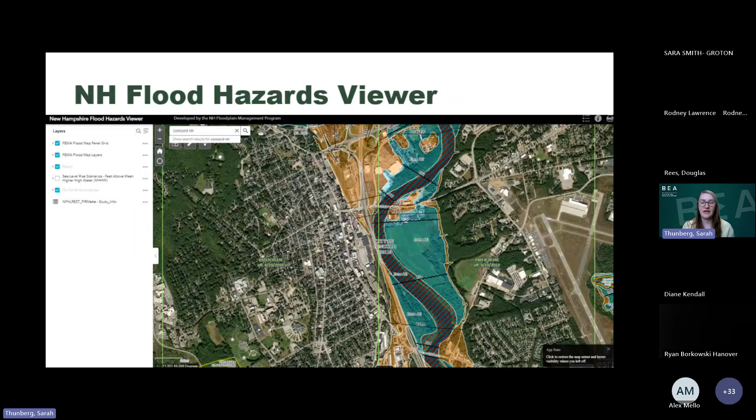So the New Hampshire Flood Hazards Viewer looks almost identical to the FEMA Flood Hazards Viewer. Right here I have a screenshot of the City of Concord's floodplain maps. We'll go over what all of these different zones mean later, but as you can see, it's very detailed - there are specific areas within the floodplain that have different risks associated with them.

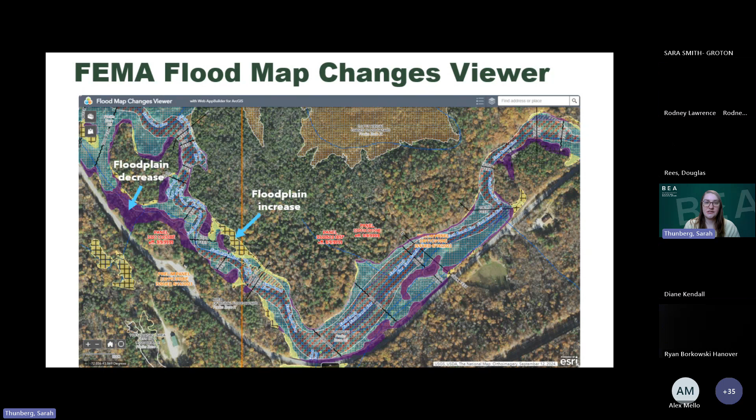Another thing you can see on the Flood Map Changes Viewer is areas that have been removed from the floodplain - all of this purple area is actually getting removed. So anyone that had a flood insurance policy in that area will have the opportunity to not pay for that policy anymore if they choose, or they can also keep the policy if they want. It also shows areas where the floodplain has increased or just shifted, shown in the hatched yellow here.

So what are the flood insurance rate maps and FIS reports used for? They are primarily produced by FEMA and then used by municipal officials to determine which areas of their community are subject to floodplain development regulations and the building requirements that apply for development in different areas within the floodplain. Mortgage lenders also use these floodplain maps to determine which properties require flood insurance as a condition of their mortgage or loan. They're also used by the general public to understand the flood risk in their area.

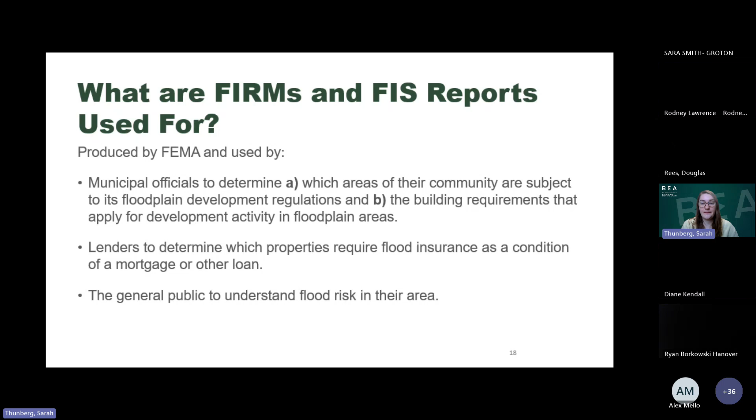So what is actually shown on these maps? What we commonly call the floodplain is technically called the 1% annual chance flood—the area that would be covered by water during a 100-year flooding event. It's sometimes called the base flood or the 100-year flood because statistically you would see a flood like this once every 100 years. Now that does not mean that once every 100 years there will be one of these floods, or that every 100 years there will only be one. You can have 100-year floods in back-to-back years or within the same year, depending on how the weather patterns happen. This is just a statistical number.

So the 1% annual chance flood area shown on the firm is also called the special flood hazard area. In your zoning ordinance, you're typically going to see this referred to as the special flood hazard area, or SFHA.

Let's actually look at some maps right now. There's many different zones within the floodplain, and generally they're going to start with either the letter A or V. A is inland and V is coastal. Areas outside the special flood hazard area are designated as Zone X.

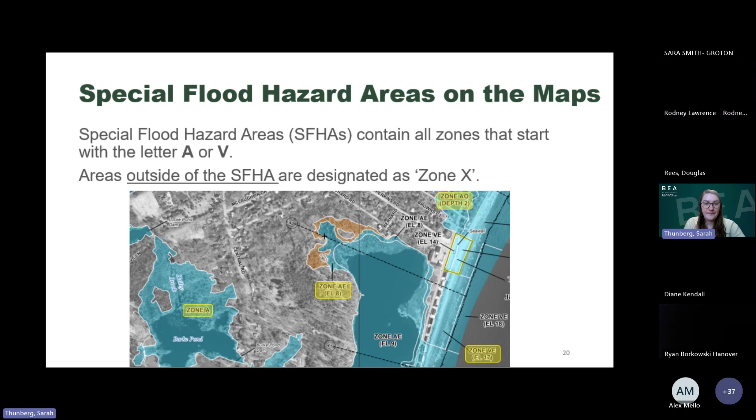Zone AE is the most common floodplain designation in New Hampshire. It is an inland floodplain which includes a base flood elevation, and it also may include a floodway along rivers and streams. The base flood elevation is essentially just elevation data showing how high geographically that water will be at the 100-year flood. Not every floodplain has been mapped to that amount of detail, so there are many Zone A's in New Hampshire, which are kind of just an approximation of the floodplain, but do not have any elevation data to show how high that water would actually be.

Then there are some areas called Zone AO, typically found like behind a sand dune on a beach, where during the 100-year flooding event that area will have what's referred to as shallow flooding, and the floodwaters will overtop some sand dunes or a levee or whatever kind of barrier berm is in the area, and then pool to a depth between 1 to 3 feet. On your Zone AOs, it typically does indicate exactly whether it's 1, 2, or 3 feet.

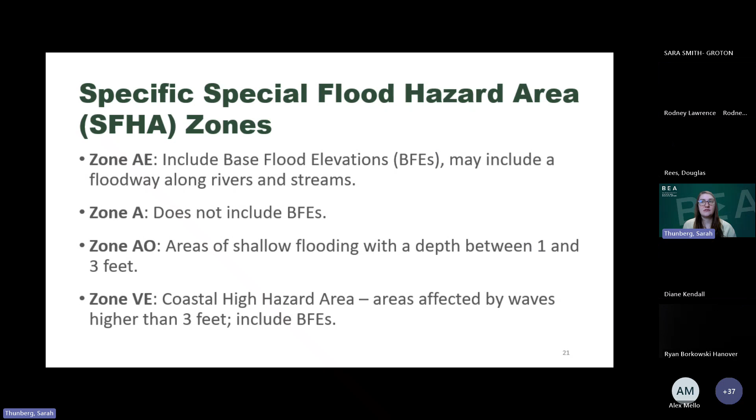Then there's also the coastal high hazard area that's called Zone VE. This is affected by waves higher than 3 feet, and those zones do include base flood elevations.

The base flood elevations shown on the maps are always rounded to the nearest whole foot. There is more detailed data in the flood insurance study that goes to the nearest tenth of a foot. That should be used for any elevation certificates, but for just general approximation, the whole foot is reasonable enough.

So the base flood elevation shows the height to which floodwater would be expected to rise in the 1% annual chance flood event. This is not a flood depth, because that is only during the 1% annual chance flood event. So if you have something that would be more considered a 50-year flood, the base flood elevation would not be indicating the depth of that water.

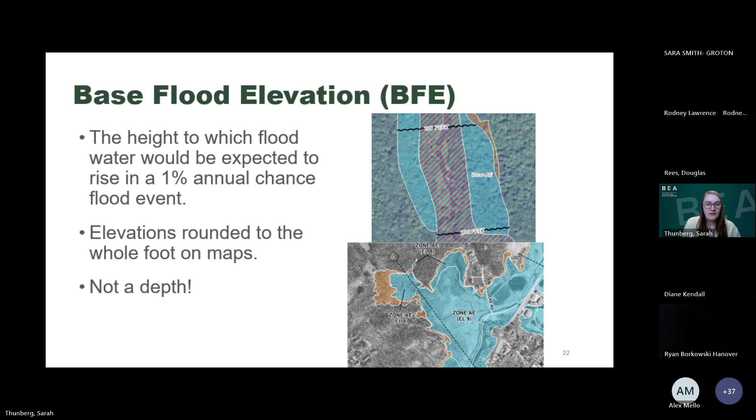Another portion of the floodplain you will commonly see along rivers is called the regulatory floodway. This is the area that will experience the highest amount and fastest flowing water during the 100-year flood event. The main hazard is the velocity of the water, flowing very fast, and the floodway is typically reserved for it. Most communities do not allow any development at all within the floodway, because that area needs to be reserved to make sure that if that 100-year flood does come, there is no obstruction to clear that floodwater away.

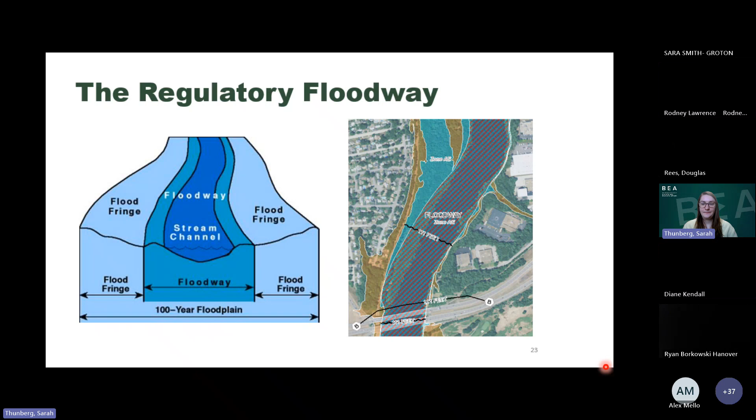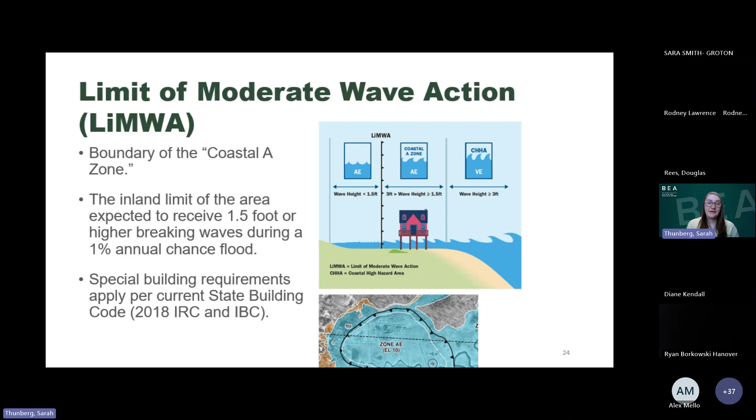In our coastal areas, there is a distinction between coastal and inland areas, and that is what we call the limit of moderate wave action, or LIMWA. It is the boundary of what we call the coastal A zone, the inland limit of the area expected to receive 1.5 feet or higher of breaking waves during the 1% annual chance flood. This area from the limit of moderate wave action seaward does have special building requirements that apply per the state building code.

Along with the flood insurance rate maps, there is something called the flood insurance study. This is a very detailed report about the flood analysis used to prepare the maps. It also includes important tables and charts with base flood elevation information.

So what do community officials need to know to use these flood maps, or why do they need to know how to use them? Your community floodplain regulations apply to all lands designated as special flood hazard areas on these maps. That is part of the agreement to participate. Communities agree that these flood insurance rate maps are the legal maps they will use to determine if properties are in the floodplain and to determine which floodplain development regulations apply.

These floodplain maps have different zones with different building requirements, such as the floodway, which typically allows no development. Depending on the community, some allow some development within the floodplain but not within the floodway. Some communities prohibit development in all of the floodplain. Those regulations are really determined at the community level, and they're different from community to community.

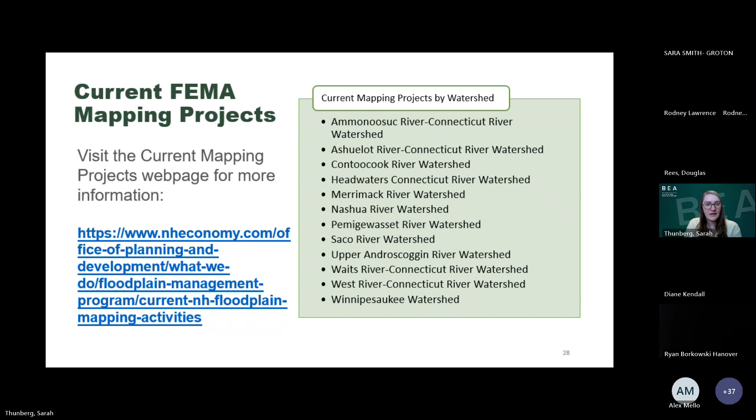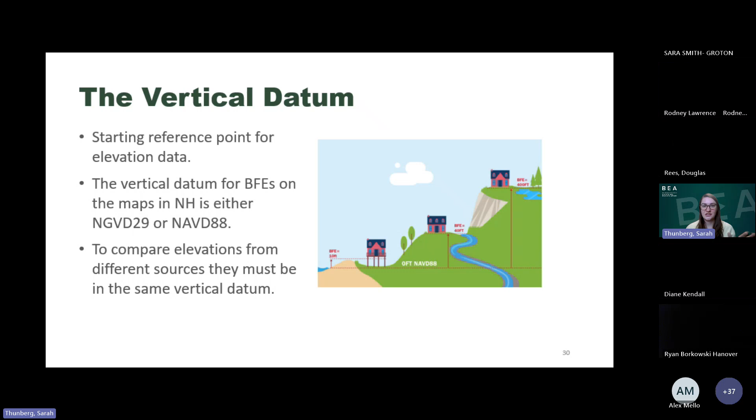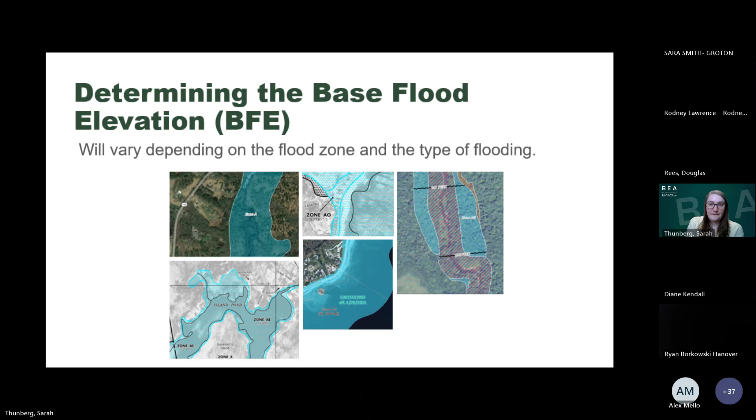How you determine the base flood elevation varies depending on which flood zone the property is located in. For most AE zones, the flood insurance study report includes more precise base flood elevation data than what's on the map, because the map only shows the base flood to the nearest whole foot, whereas the flood insurance study goes to the nearest tenth of a foot. If you're issuing an elevation certificate or a certificate of occupancy, you want to make sure you're comparing it to the most accurate data you have.

The flood insurance study also has a couple other data tables to get more precise base flood elevation data. If there's a still water body, like lakes, ponds, or some coastal areas, there's what's called a still water elevation table in the flood insurance study. It also has flood profiles, which show the height of the base flood elevation along the distance of a river. There's also the floodway data table, which has cross sections across the river with corresponding heights for that base flood elevation.

We're going to start with the easiest and work our way up to the hardest. Starting with zone A, as I said earlier, there is no base flood elevation for these zones, so that can create a bit of a complicated situation. Depending on your community regulations, that's really going to determine how you move forward to determine the base flood elevation for these areas.

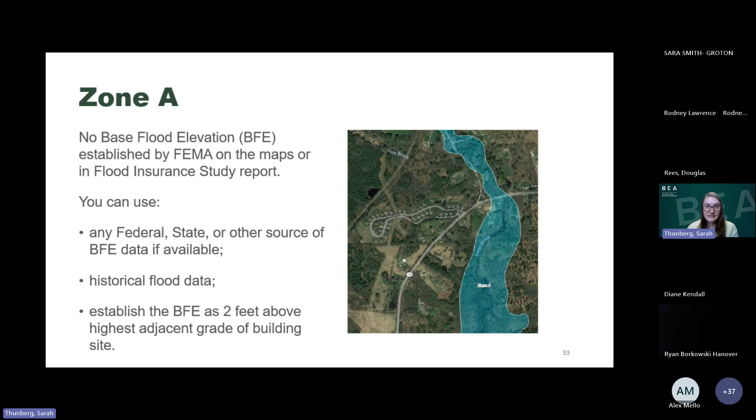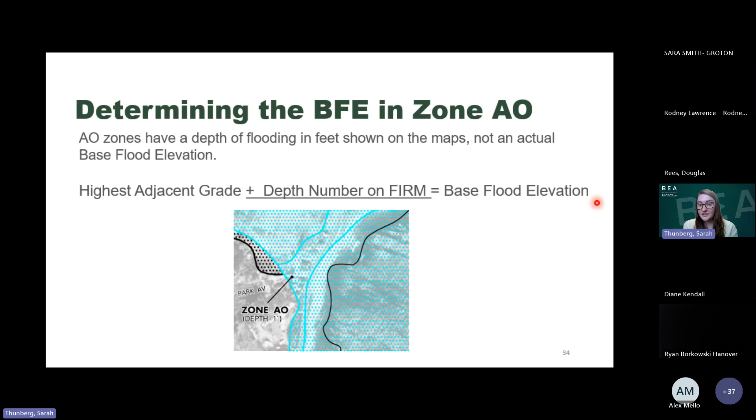All right, so AO zones are also pretty easy to figure out the base flood elevation. Your AO zone is going to specify the depth of that floodwater. To determine your base flood elevation, all you want to do is take the highest adjacent grade of the building, add the depth shown on the AO depth, and add those together—that's going to be your base flood elevation. Simple as that for AO zones.

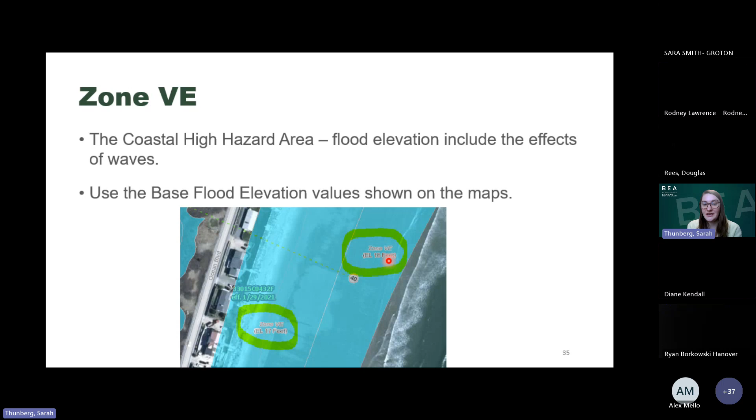VE zones are pretty easy as well. The coastal high hazard area just has the elevation right there, so you're just going to read off the map for what your base flood elevation is for these VE zones.

Now in that area along the coast that transitions over to AE zones, you want to check between the map and the flood insurance study, because sometimes for those coastal AE zones, depending on the high water, it might be different. So look up the BFE on the map and also use the flood insurance study report, and whichever of those two is higher, you want to use that. FEMA has a nice little introduction to coastal flood mapping that can be helpful if you're in a community that has these areas.

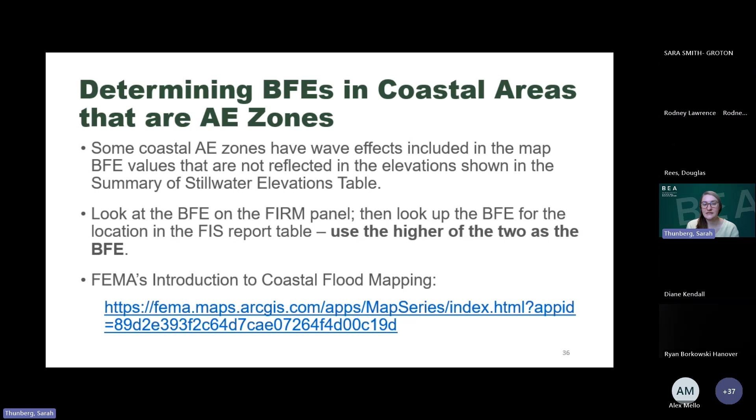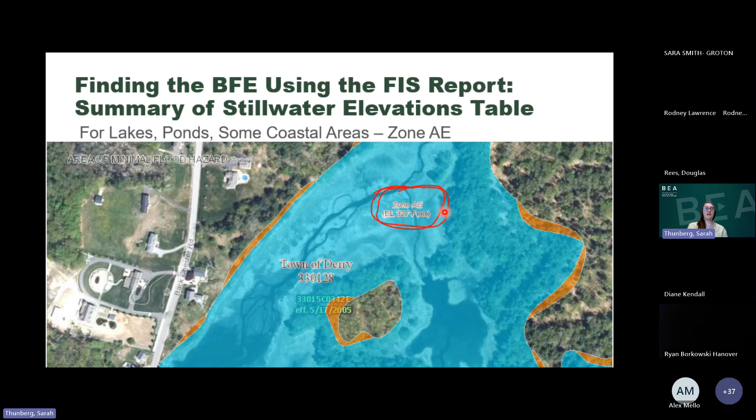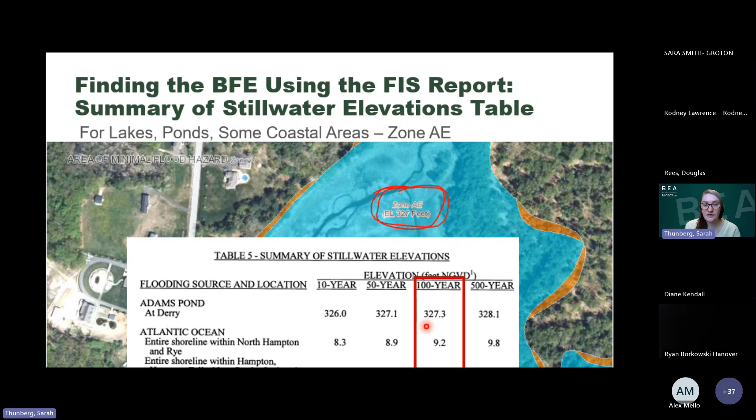For ponds, lakes, or anything with a still water elevation, you'll want to look at the flood insurance study, because it has a table summary of still water elevations. On the map, the elevation is rounded to the nearest whole foot, but the still water elevation table goes down to the nearest tenth of a foot. You always want to use the most accurate data available.

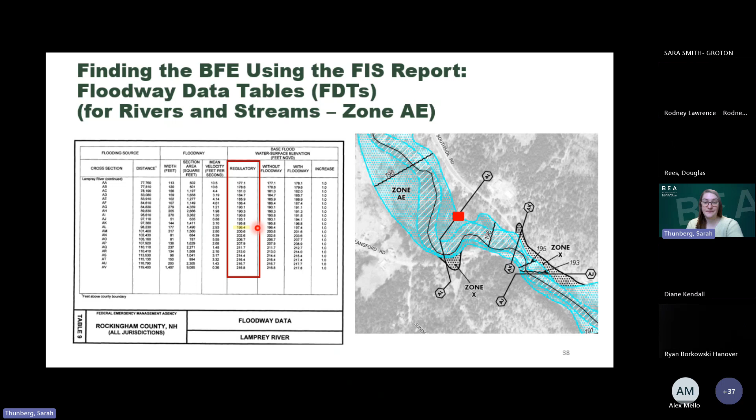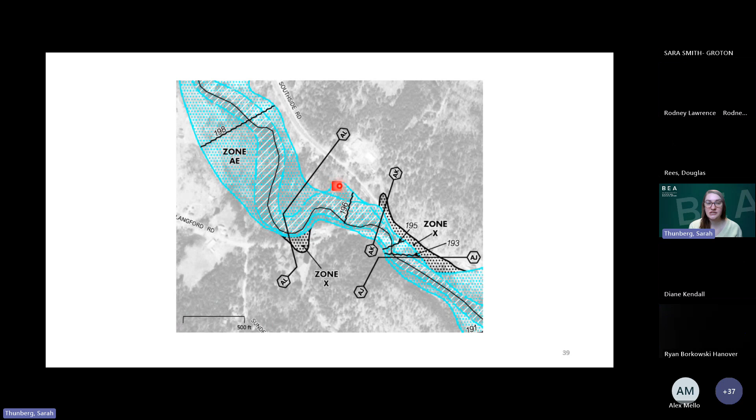But what if you have a property that isn't perfectly lined up with a cross section? This takes a little bit of math, or really graph reading. The floodplain map has a scale, and you'll want to use that scale to measure the distance to the closest cross section. Then you go over to the flood profile, which shows distance going up the river, and elevation.

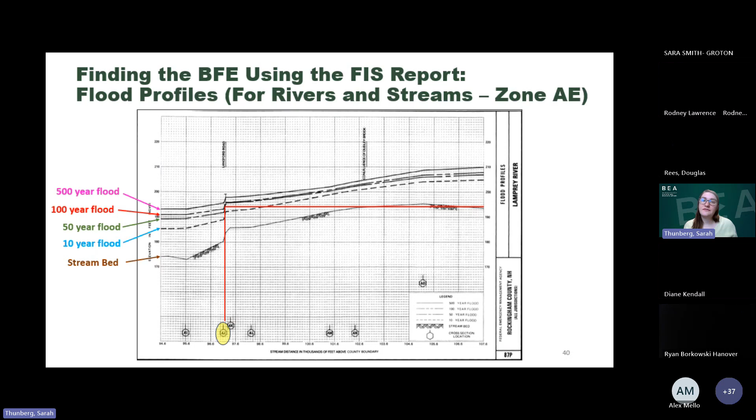So that's how you find base flood elevation for all of the different flood zones we have in the state of New Hampshire. Now let's talk about insurance.

Over the last couple of years we've had a lot of flooding, whether it's coastal winter flooding or summer flash flooding from thunderstorms. New Hampshire is well aware that anywhere it can rain, it can flood, even if you're on top of a hill.

For most private flood insurance, generally you have to be in the floodplain to purchase insurance. But through the National Flood Insurance Program, any resident or business owner is eligible to purchase flood insurance as long as they're in a participating community. Flood insurance is a good idea because your home and renter's insurance typically does not cover flooding damage.

Additionally, flood insurance pays for damages regardless of whether there's a presidential disaster declaration or not, so it captures even nuisance floods. If you get a little bit of damage, like if the end of your driveway washes out, you can file a claim and get money for a new culvert and new paving.

The National Flood Insurance Program also covers damages that aren't necessarily flood related. There's an aspect where if a house is substantially damaged, meaning it's been damaged by more than half its market value, and that damage can be caused by a tree falling on the house, a fire, or a flood, the NFIP will pay to fix up that house regardless of the cause. As long as it was substantially damaged, you can use the flood insurance to get payment for that.

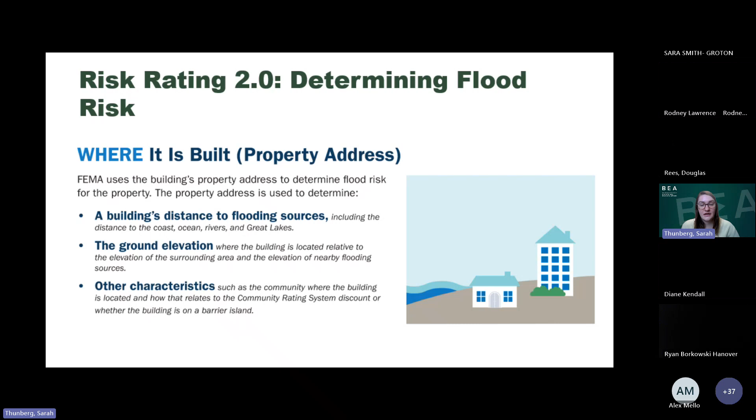FEMA is going to look at where a property is built, its distance to coasts, oceans, rivers, lakes. It's going to look at the ground elevation and how high the property is compared to nearby flooding sources. It's also going to look at which community the property is located in and whether or not that community has higher than the minimum building standards.

FEMA is also going to look at how the building is built - its foundation type, first floor height, number of floors, whether it's a first floor apartment or a 6th floor apartment. Construction type, whether it's a brick building or a wood building, if there are any flood openings, and also where your utilities are, whether in the basement, first floor, or up in the attic. All of that adds up to a different risk.

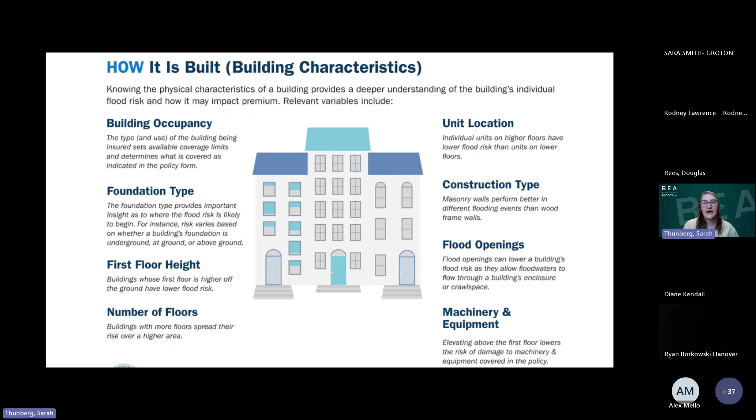Lastly, FEMA is going to look at what is being covered. If you're covering a single family home, an apartment complex, a mall, or a hospital, all of those are different uses, different contents, and different risks associated with the building. FEMA assembles all of that information and determines a unique policy premium for that structure itself. So if you have a new house and your neighbor has a 100-year-old house, your premiums are probably going to look very different, even though you have essentially the same flood risk due to location, but different risk due to construction.

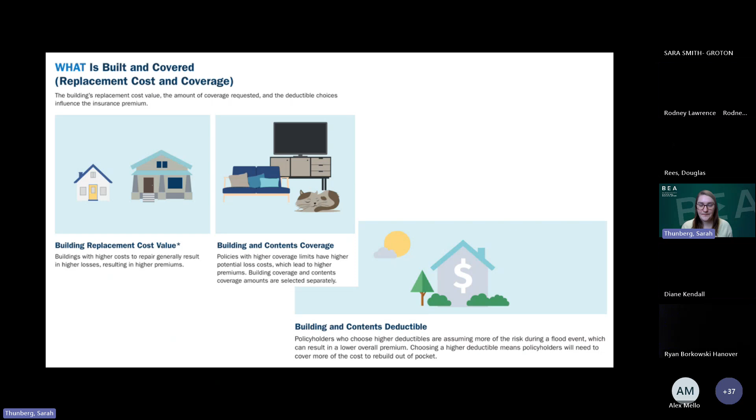For those of you more familiar with the program, what's new is this risk rating 2.0, as FEMA is calling it. FEMA has a risk rating engine that is reducing some of the complexity of the quote process. It has eliminated the requirement for an elevation certificate. It's expanding the mitigation discounts, expanding CRS discounts, and phasing out the preferred risk policy.

But what is not changing? The use of flood insurance rate maps for community floodplain management - that's not going away, that's still staying. The requirement for flood insurance as a condition of a mortgage, that's still staying. Also, the letter of map change process is staying the same.

Now, what does this mean for floodplain administrators? The flood insurance rate maps are still going to be used for the purpose of floodplain management and planning. And the risk rating variables should be considered to help lower policy premiums for future home buyers and current property owners.

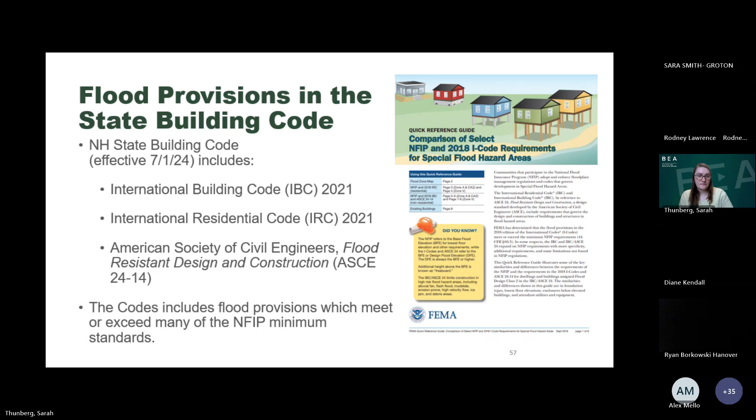So what are some of the specific requirements? All proposed development in the special flood hazard area requires a local permit. Some communities will have this incorporated in the building permit, and some communities have a standalone floodplain development permit too.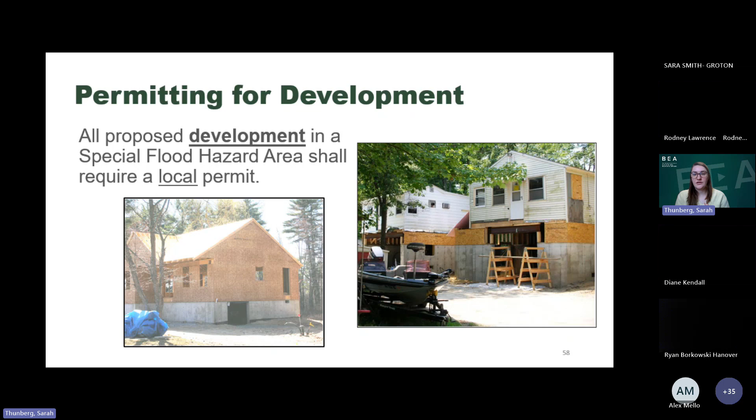This is because floodplain development includes many different activities that are not always incorporated within the building permit. These can be drilling, storage of equipment or materials, dredging, filling, paving, mining, in addition to just typical building construction. It's always a good idea, because sometimes building permits can miss some of this other development that needs to be regulated within the floodplain.

So having a standalone floodplain development ordinance or floodplain development permit is a good idea to make sure you're capturing all of these types of development.

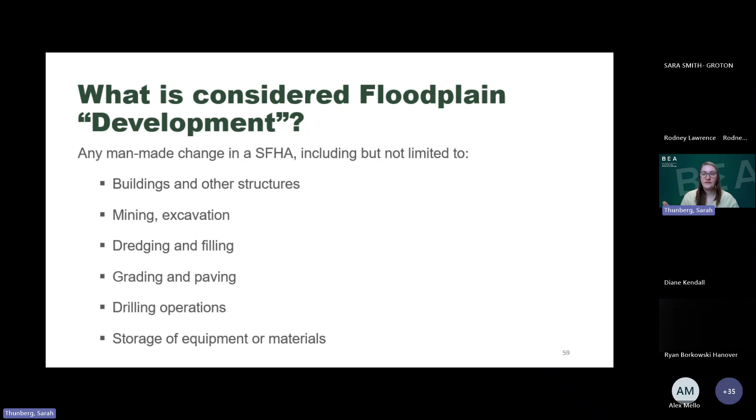A community's permitting process for floodplain development should first include a process to determine whether the development is located in the special flood hazard area or not. The community needs to make this decision to know which portions of their floodplain regulations will apply to this property.

Secondly, if a permit is required, a permit application detailing the project details is required so the community can determine what kind of regulations will apply.

Third, a community needs a process to ensure, ideally during construction but at the very least once the proposed development is completed, that the development complies with the community's floodplain regulations for any new or substantially improved structures. The community is required to obtain as-built elevation data, review it for compliance, and maintain it on file.

And lastly, if development is found to not meet the community's floodplain regulations, the community must follow their enforcement process, just like any other zoning violation, to address the noncompliance.

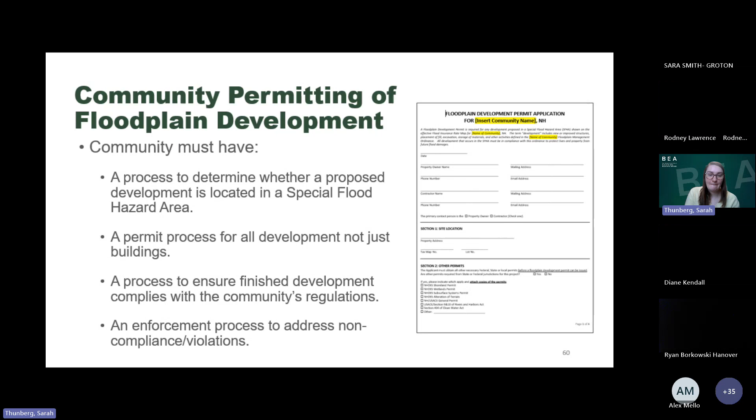So to help communities document these permitting processes, our office has developed a fact sheet called the Guidance for Best Practices for an Effective Local Floodplain Management Program. This document provides guidance to communities on who and what should be involved in each process.

And to accompany the guidance document, we've also developed sample floodplain development administrative procedures for local communities to adopt, with both a coastal and a non-coastal version. The purpose of these procedures is to ensure communities adhere to their regulations and maintain consistency when there's new staff, to remain in good standing with the National Flood Insurance Program.

If your community already has good administrative procedures, it's still recommended that they're written down in a standard operating procedure or something similar, because there's a lot of staff turnover in these small communities, and making sure those procedures are written down is a good way to ensure all of the permitting is consistent.

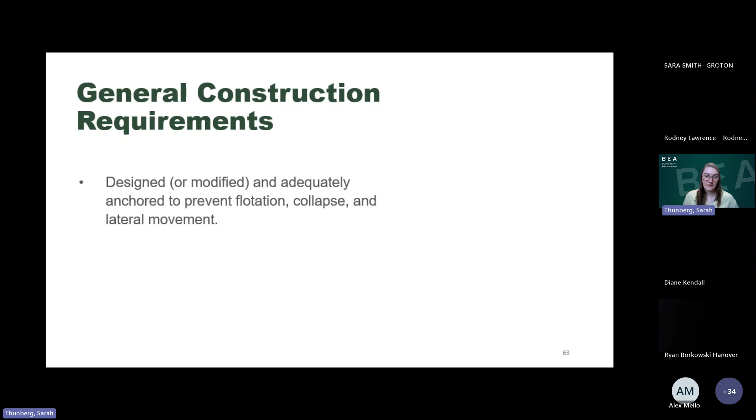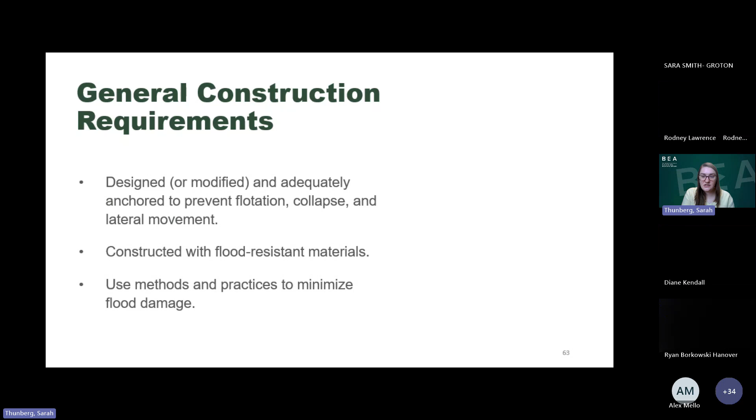Some general construction requirements in the floodplain ordinance: first, development has to be designed or modified and adequately anchored to prevent flotation, collapse, and lateral movement. It also has to be constructed with flood-resistant materials and use methods and practices to minimize flood damage. FEMA has some guidance documents on each of these to help community officials and engineers make sure construction and development is fully compliant.

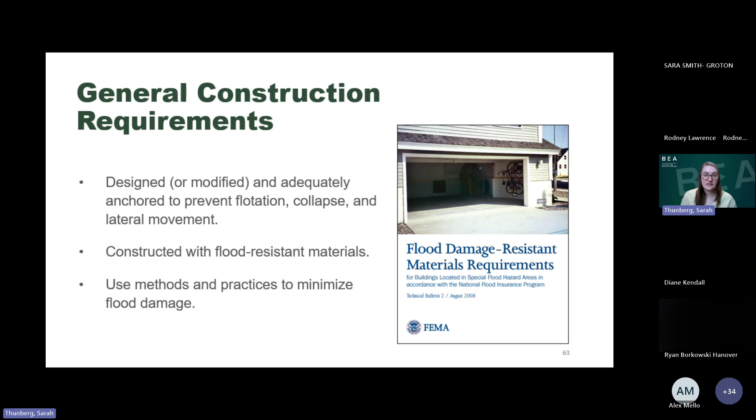Floodplain ordinances also include requirements for utility and mechanical regulations. Best practice is to require in the ordinance that utilities be elevated to at least the base flood elevation, especially if the community requires the lowest floor of the structure to be above the base flood elevation. The ordinance should also detail requirements for new or replacement water and sewer systems, including septic.

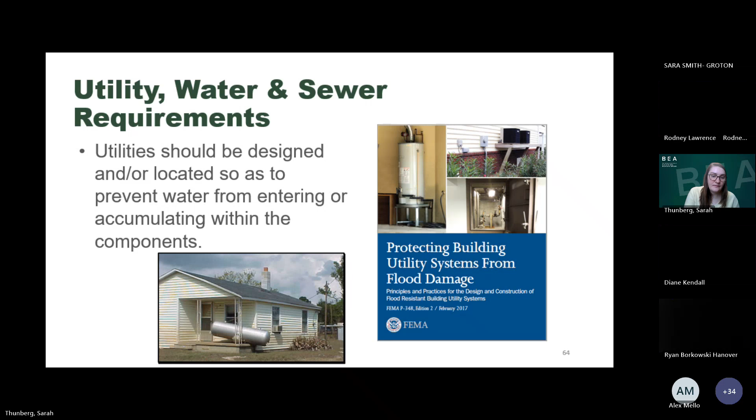New construction or substantial improvement of a structure, at minimum, requires elevation of the lowest floor to be at least the NFIP requirement, as high as the base flood elevation. New Hampshire State Building Code requires the lowest floor to be elevated to at least 1 foot above the base flood elevation, and this applies to all development in the A zones, whether A, AE, or AO.

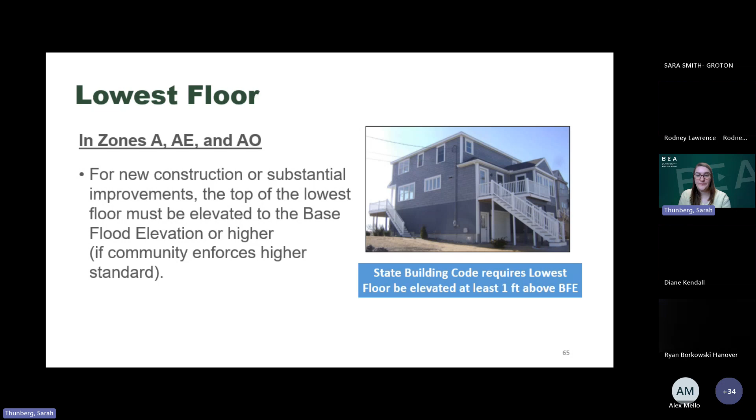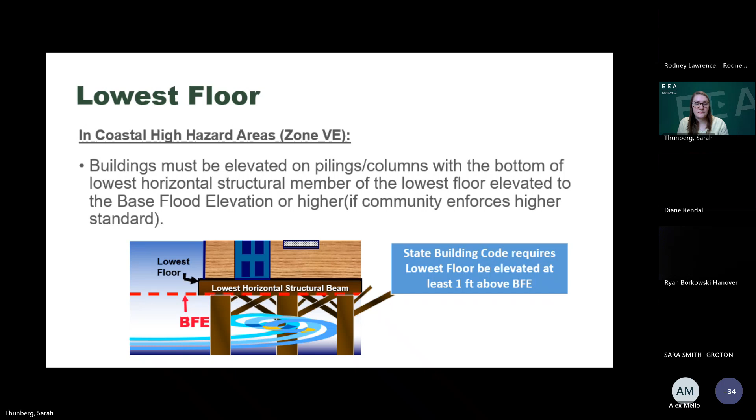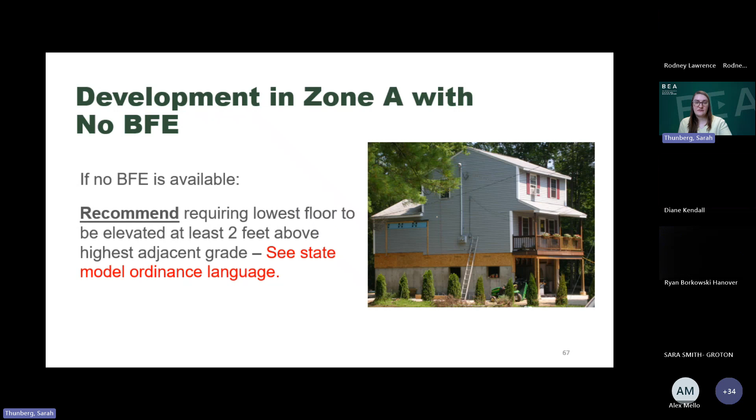For development in zone A with no BFE, it's really up to the communities themselves to determine how they want to handle this. It's recommended that communities require the lowest floor to be elevated at least 2 feet above the highest adjacent grade. We have that in our state model ordinance, and that is generally best practice for dealing with Zone A.

That's because during the 100-year flood, if you're going to have water coming up 5 feet up your foundation, you don't want your basement to be empty, because all of that pressure from water pushing on the foundation is going to crumble it, and your house is going to fall into the basement if there's no water on the inside pressing against it. That's what these flood openings are for—to make sure the pressure gets equalized so the foundation doesn't crumble.

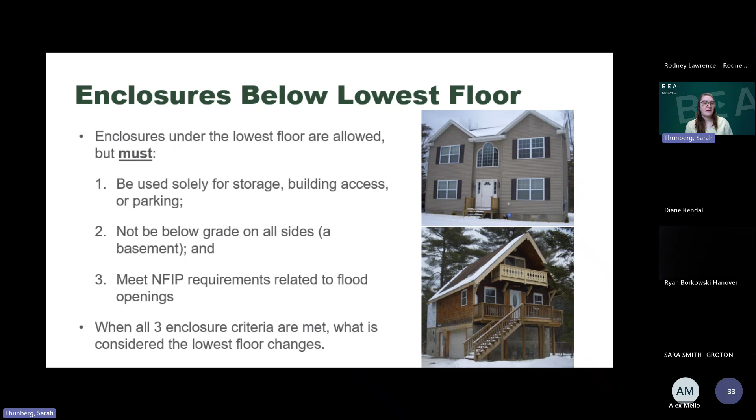In the coastal high hazard area, the enclosures below the lowest floor have to be free of obstructions, constructed with non-supporting breakaway walls, open lattice work, or insect screening, and they can only be used for parking, building access, or storage.

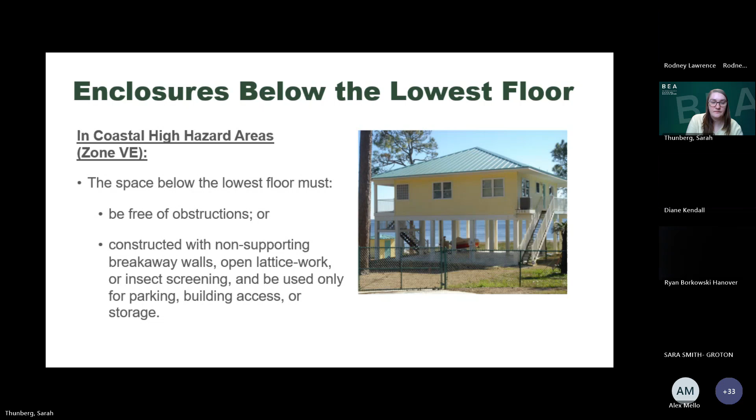So what exactly is considered a basement? This is any area of a building that has its floor below grade on all sides, and it doesn't matter how deep that is. So you could be thinking that it's a crawl space, but if it is below grade on all sides, then that is going to be called the lowest floor, a basement, even if it's a 2-foot crawl space.

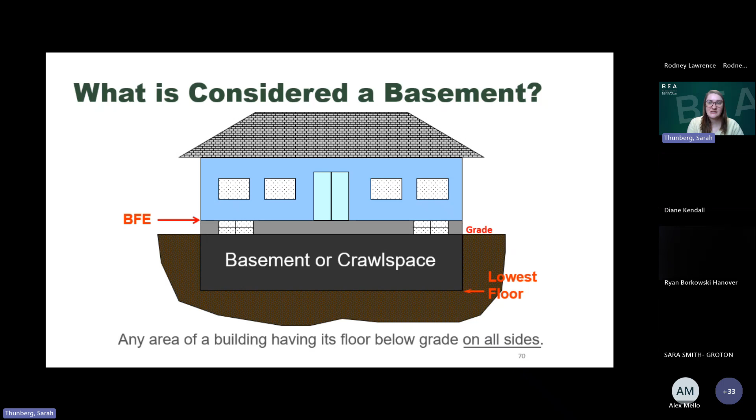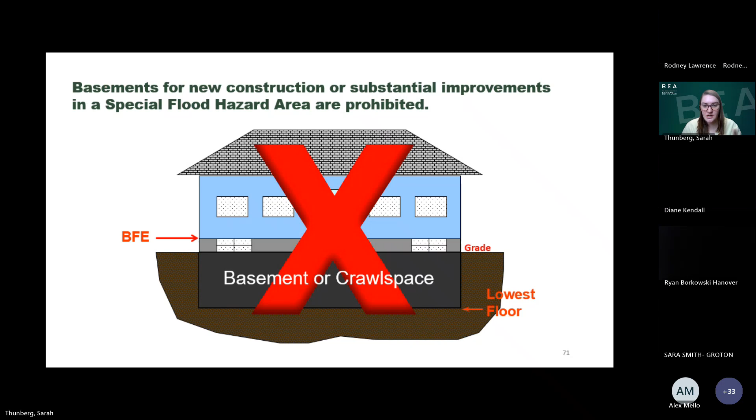Basements for new construction or substantial improvements that are in the special flood hazard area are not allowed. Just not allowed. The only way you're going to get around that is through flood openings and enclosures, or changing that use to only storage or parking, or opening it up so that it's not below grade on all sides.

FEMA has a document called Technical Bulletin 1. It's a guidance document on requirements for flood openings, and it's got a bunch of engineering resources on how to do that.

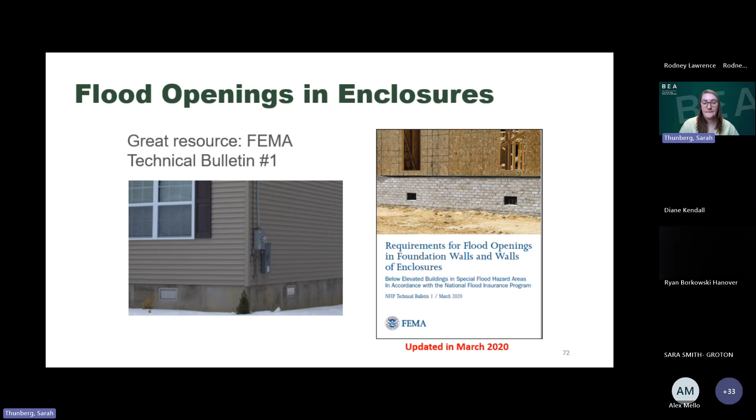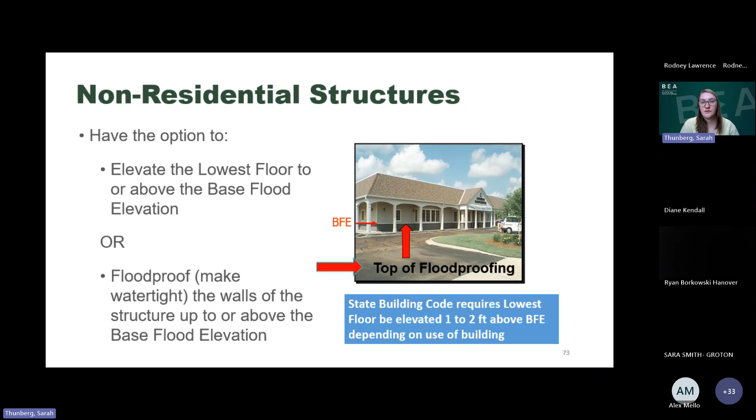So after the construction is done, communities are encouraged to obtain as-built elevation data. This can be through a couple different things. It could be through what's called an elevation certificate.

Generally, elevation certificates are recommended for all development in the floodplain. It's a legal document that a surveyor or an engineer has stamped and put their license behind, that says the lowest floor of this house is this high. And if there is any discrepancy or disagreement about that, or if for some reason this goes to court, the elevation certificate is going to be the legal document that is referred back to.

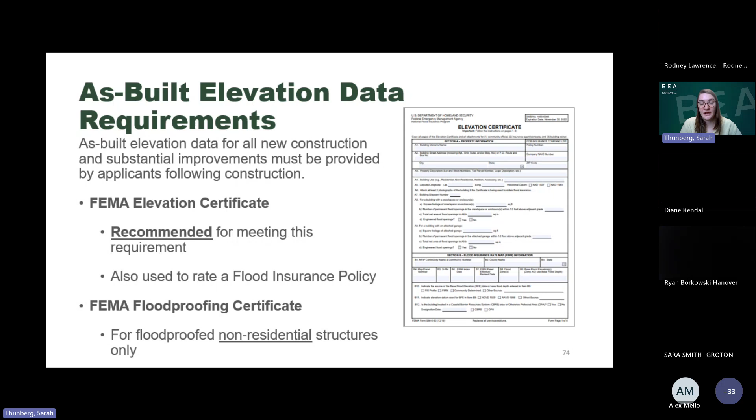So it's always a good idea as a community to have those elevation certificates in your back pocket in case there's any disagreement about whether or not this building was permitted correctly. There's also something called a flood proofing certificate for non-residential structures, saying that they have been flood proofed to or above the base flood elevation and are compliant with the NFIP regulations.

So you've heard me talk about substantial improvement a couple times. Essentially, you have buildings that existed before FEMA made the floodplain maps, and those buildings were grandfathered into the program. They were not required to come into compliance.

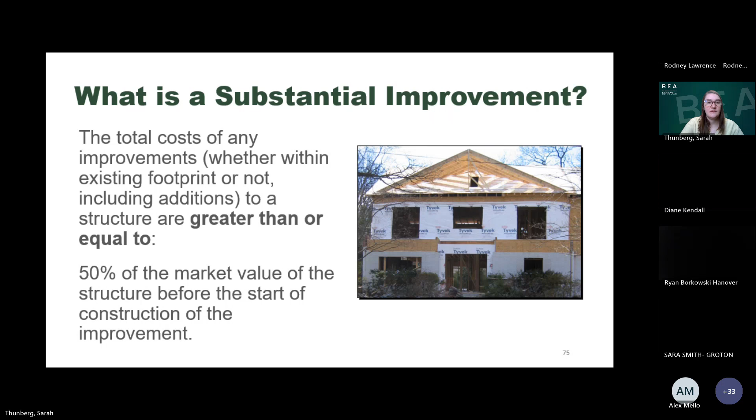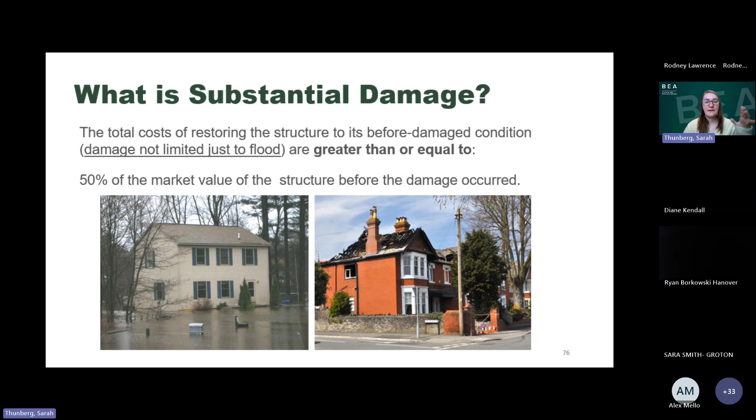It has to be at least 1 foot above the base flood elevation, and all of the other requirements. Substantial damage is pretty similar, and used similarly to substantial improvement. Essentially, if the construction costs to repair a building, or if a building has been damaged by more than half of its market value, then that building is going to need to come into full compliance with the National Flood Insurance Program.

So communities have to be aware when development is starting to get to that threshold of half of the market value, because the determination has to be made by the community. You have to review all proposed costs for all the improvements and repairs submitted by the applicant, and then determine the market value of the structure only, not the land, just the structure.

And if it is determined that the building is substantially improved or damaged, the structure must be brought into compliance with the community's floodplain regulations as if it is a new construction.

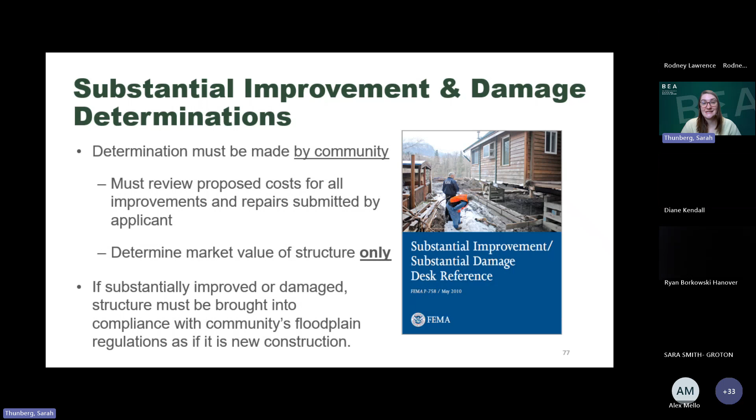There are some resources that we have on our website: a substantial improvement and damage application packet, and a property owner guide to requirements. So we have these documents on our website.

So then some other miscellaneous requirements that your community might have in the floodplain ordinance. So if your community has a floodway...

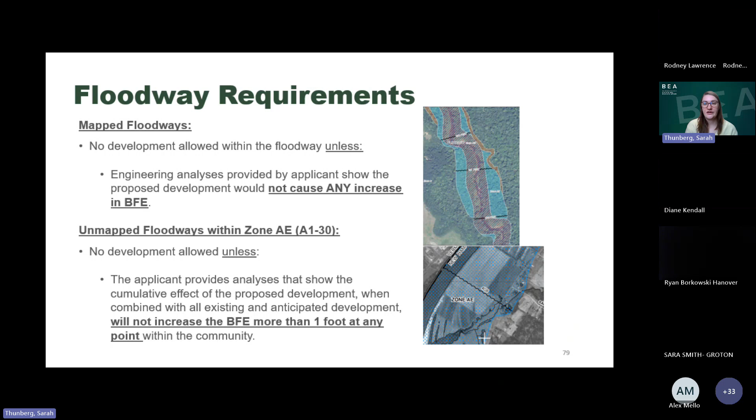All right, so manufactured homes. These have some other requirements because they're technically movable, but not easily movable. So they have to be elevated on a permanent foundation with the lowest floor at or above the base flood elevation, and they also must be securely anchored to the ground in the foundation. FEMA has a guidance document on how to protect manufactured homes from floods and other hazards.

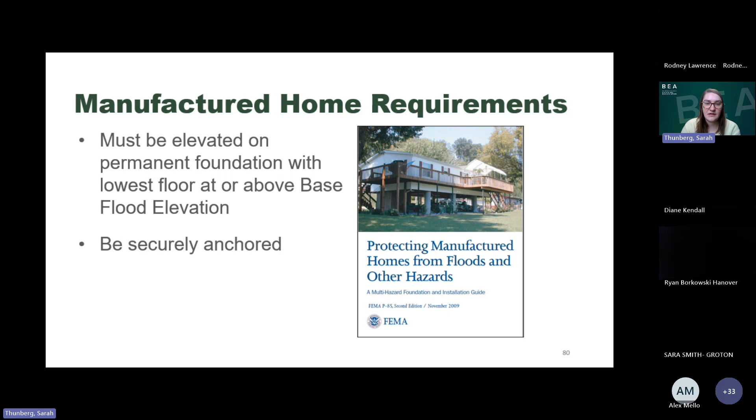So recreational vehicles. These can kind of get a little iffy. RVs are allowed on site as long as it is on location for less than 180 consecutive days, or it has to be fully licensed and ready for highway use. No structures can be attached to the RVs.

And if it doesn't meet that, like if it is going to be essentially used as a permanent home and it's not ready for highway use, it is going to be considered a manufactured home. And all of the regulations for a manufactured home are going to apply to it in that case. So it would have to be on a foundation and adequately anchored.

So communities are allowed to grant variances on the floodplain regulations, although it is not advised. This is really only used in the instance where you have a development or a building or structure that has to be in a specific location due to its use.

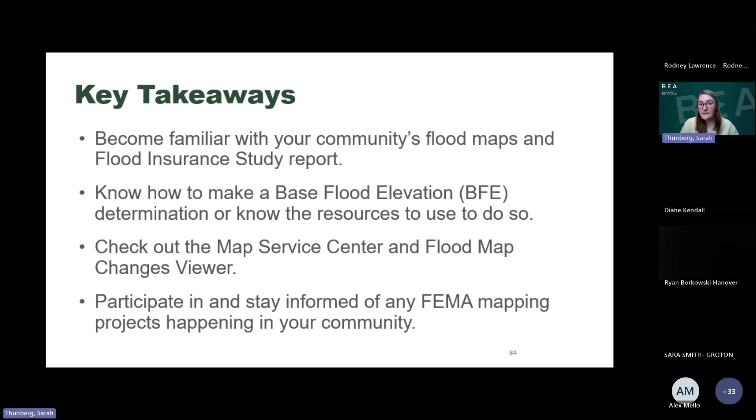Also have an effective permit and enforcement process that is documented for all development in your special flood hazard area. Develop administrative procedures to ensure adherence, consistency, and maintain good standing within the NFIP.

Also, you want to make sure that you are understanding your own community's floodplain regulations and whether or not your community has higher standards. Also get familiar with the guidance and resources available. And if you have any questions, please reach out to me or the New Hampshire Office of Planning and Development.

For more information, we have some resource documents and guides on our website. We also have a quarterly newsletter and a YouTube channel. The YouTube channel will have recordings of other old trainings such as this one. And we also have some more trainings coming this spring.